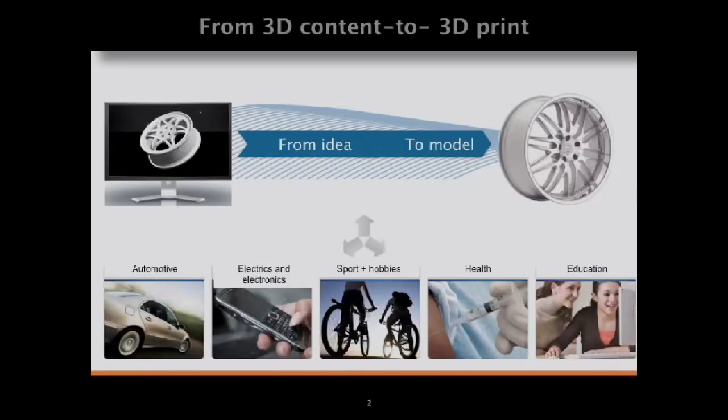The big importance of 3D printing is to realize a real model and validate the concept. It means when I design something - say I'm in the car industry and want to design a part for cars - on the screen I see it in 3D, but once I print it, I can really see all possible errors I could make, or modifications I have to do, just to have a validated part.

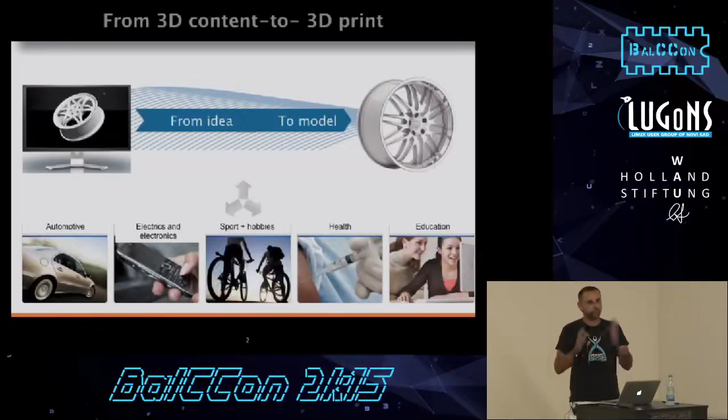After that, we started to go further into electronics. For example, we have cell phones - we design the phone, put electronics inside, validate the concept, and once we make the hardware working properly, we can start serial production. So it's a kind of intermediate stage between development and industrialization. It can save us a lot of money, because once we make errors and discover them during the production process, we lose a lot of money.

And for sure... oh, fuck.

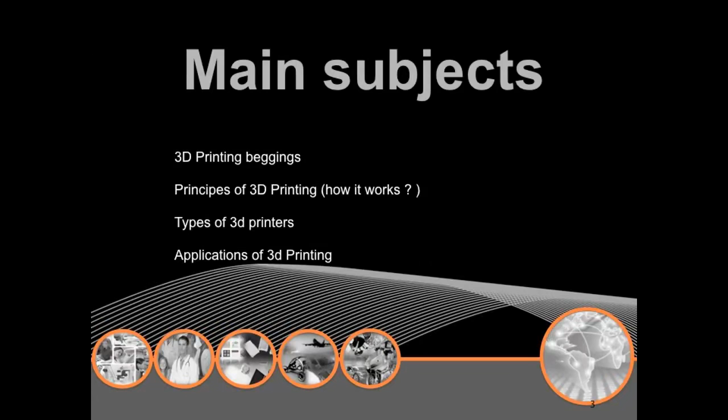Never mind. About the subjects, I would like to talk about the beginnings of 3D printing, because although we started talking about it a couple of years ago, the technology has existed for 30 years. Since then we've been printing in plastics, metal, and now we're even able to print in chocolate or sugar, in colors or monochrome.

Also about how it works - how we print in 3D, what is the secret, what is the main procedure, the principle of 3D printing, about the printers, and all interesting applications of 3D printing. Let's start about 3D printing, how it works.

You will see the liquid plastic and UV laser that will polymerize layer per layer. After every layer, the platform with the built hard plastic goes down, and it makes the final model. The technology is named stereolithography, and we use photosensitive polymers.

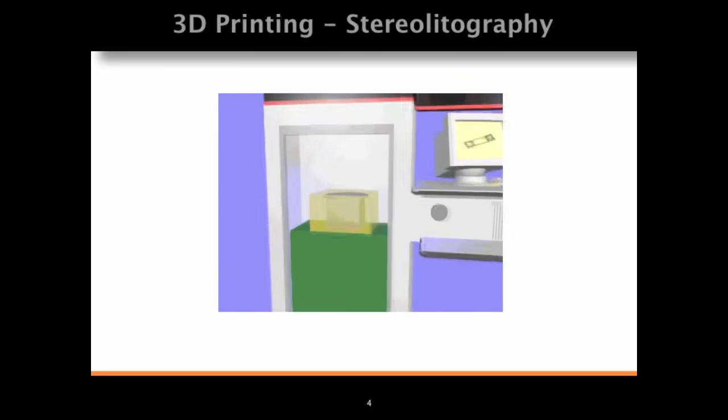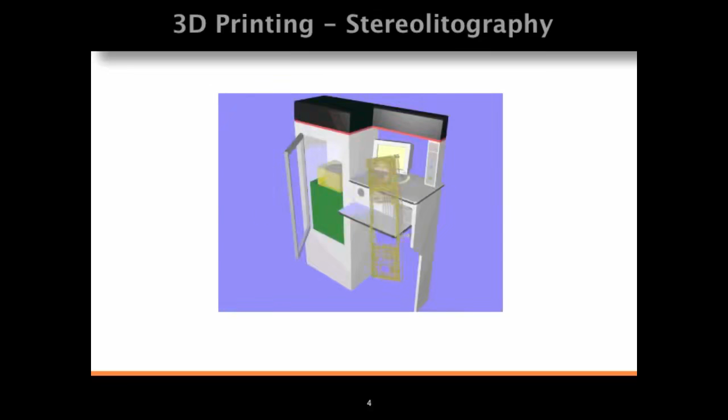Stereolithography technology is very used in the car industry, because for big, real-size parts of cars, trucks, planes and everything else, we can quickly make real models and mount them on the cars. For example, all new prototypes of very luxury cars are presented with a lot of printed parts because we can paint them, brush them, polish them. We can do a lot of things with them, and since we have different types of plastic materials, we can really present a nice and functional prototype.

We can print with liquid materials - liquid plastics sensitive to UV - or solid materials, which are plastic powders that we melt layer per layer. The main principle of 3D printing is that we print layer per layer.

If you cut circles and stack them, you get a cylinder. 3D printing is the same. So technically, it's not a very complicated process.

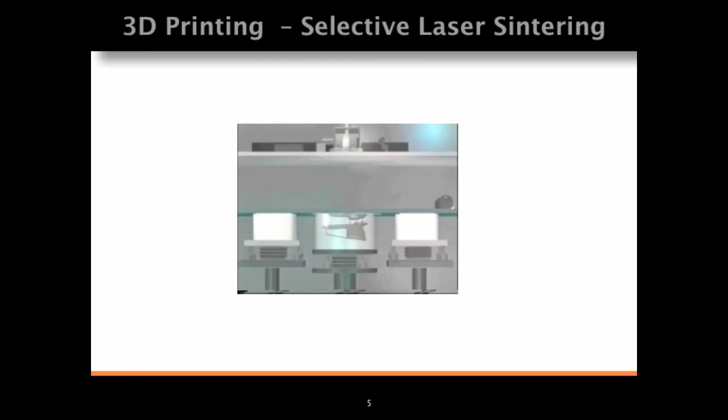Here is how it works with powders. We have a thermic laser that will melt a layer of plastic. Then we come with another layer of plastic powder, and we melt it up to the end of the part. In a couple of hours, we have our part finished.

About price range, we have three groups of printers. We have the personal ones, from 1,200 euros up to 20,000 euros.

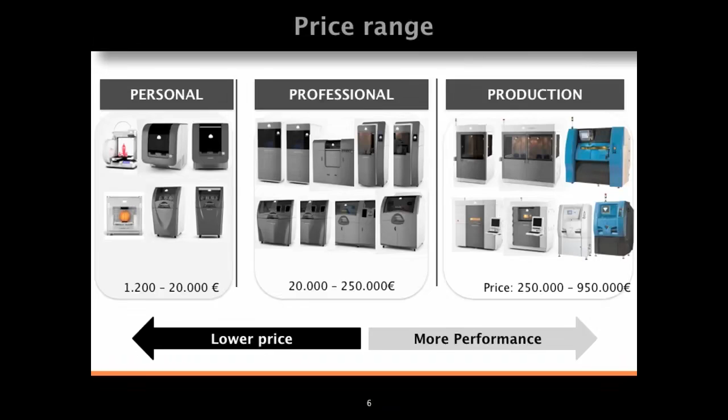We have professional machines used mainly by engineers, architects, people who make the concepts and projects before industrialization, and we have production printers. That means with those big machines, we manufacture the parts that we will mount in different industry fields.

For example, General Electric has something like 40 to 50 3D industrial printers. All big industrial leaders are also equipped with printers. Formula One teams also, every Formula One team has 3D printers.

When they have some idea for a design, some new aerodynamic parts, they draw it in 3D with CAD tools, and then print it. They can mount it on the Formula One car, check the shape, put it in the wind tunnel, and really increase their aerodynamic performance. When we make parts for planes or cars in any industry, we do the same.

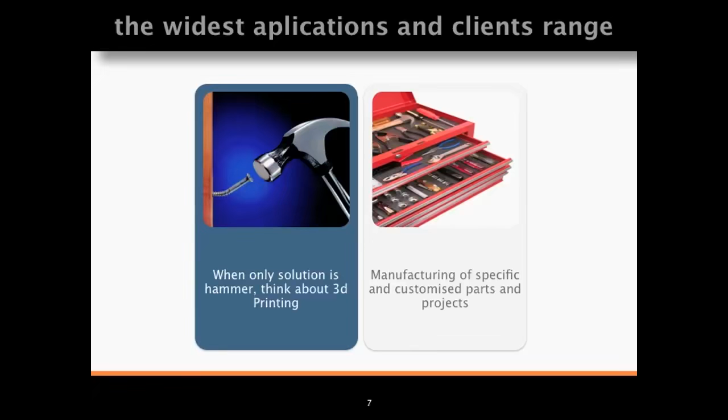As we make it layer per layer, that means we can imagine a sphere inside a sphere, and we can print a sphere in a sphere as one part. We can also print complete assemblies that you can move, and it's only one part - you cannot disassemble it, you need to break it. Otherwise, you would need to spend a lot of time making this by milling, drilling, and other conventional manufacturing methods.

During those 30 years, we got in our portfolio big clients, big companies like GM, Honda, Airbus, Toyota, BMW, Fluke, 3M, Videx, Siemens, and other industrial companies using our printers. Even ear plug devices now are printed, the plastic parts are printed. So we just put in electronics, and we can customize earplugs for every ear.

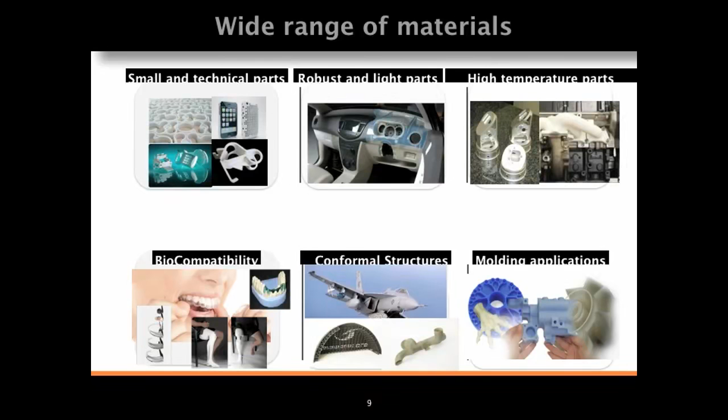Concrete example: I had a surgeon, an orthopedic surgeon, asking me, can we make specific drill machine guides that will allow us to drill the bone at a specific angle, customized to the patient. That means we scan the bone in 3D, and after that design the part adequate to his leg and his bone, to fix something in a specific position decided by the doctors, surgeons, and medicine staff. And it was possible.

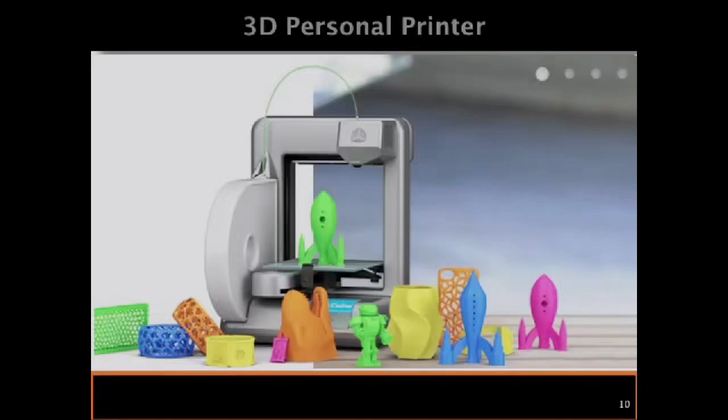I will also talk a little bit about small 3D printers, the ones you can have for your home. Those printers work with a very simple method where you have just a roll of ABS or PLA plastic. It heats and melts the plastic, and layer per layer we can design the parts. It's a perfect solution to start with 3D printing. We can even manage a couple of colors, so we can make a mix of 3 or 4 colors, for some unique parts where we just show the shape of the part. It's a very cheap and efficient technology.

What's also interesting about these personal printers is there are heaps of open source machines. I'll give you some websites afterward. You can really order the kit and learn how to do it, and make your own printer for less than 500 euros. With 2 normal 2D printers, you can make one 3D printer. It's already something you can design, for example your house or whatever you want, and you can print it and have it in your hand.

With the same principles, we can even print sugar, even in color. That means if you have a wedding cake, you can scan the bride and the groom, print them in sugar, and then after the wedding the lady eats the head of the guy. Or with chocolate, if you're a creative person, you can play with the flavor of your chocolate and design the parts in chocolate that you will eat afterward, in relation with the flavor of the chocolate.

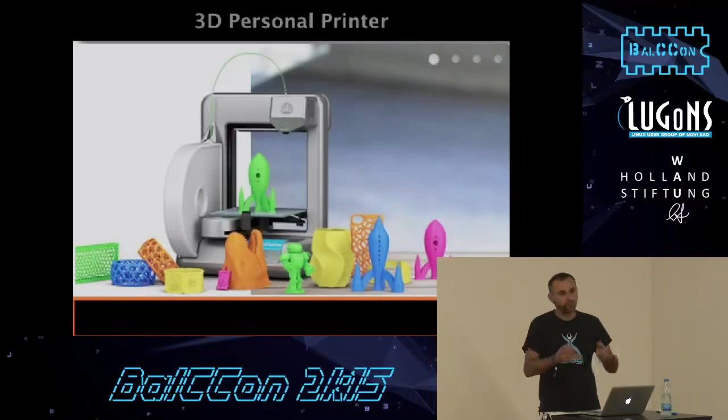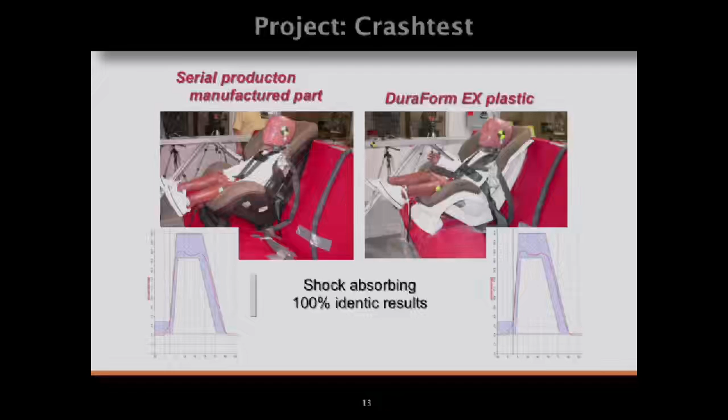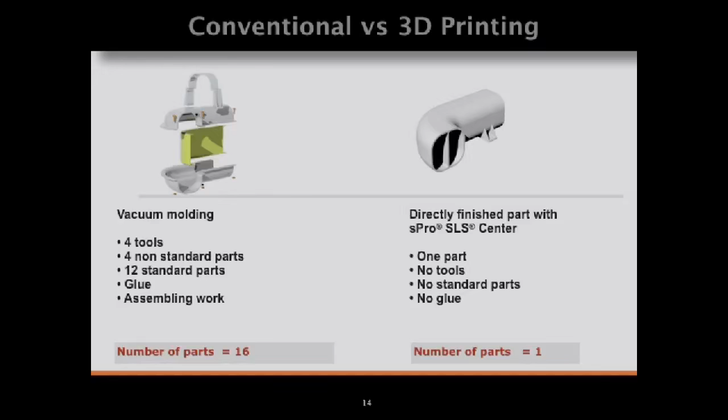Otherwise, we have, for example, conventional versus 3D printing. Same part with the same function - you have air passing through the part. With conventional methods you need 4 tools. You have non-standard parts, standard parts, glue, assembling work, and it takes more time and is more expensive than a directly printed part. There are no tools, no standard parts, no glue, nothing.

A real application of all this is cooling systems for electronics in combat planes. As they have a lot of electronics left, right, up and down, you really need ventilation with very complicated pipes and parts. With conventional methods, you need 10 days to make the final part. With 3D printing, you make it in 1 day and just mount it in the plane.

Airbus started to use these technologies to make the non-functional parts of planes. So when you fly in the new Airbus A320 series, you will have 3D printed parts - holders, brackets, and things that don't concern the structure of the plane. It goes much faster, and we can make lighter parts.

About materials, we can have a really wide range, including reinforced materials - plastics with metals, plastics with carbon fiber, with nanoparticles, with glass nanoparticles. At 1.5 kilos per cubic decimeter, we can have really rigid and resistant parts - as resistant and rigid that we mount them on Formula 1 cars and race with them.

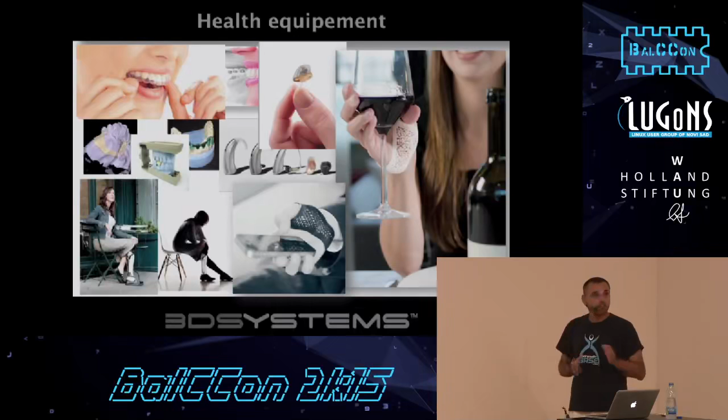Dental industry too. For the prosthesis, you don't take the print of the tooth anymore with rubber and chewing gum and all that stuff, we scan with a 3D scanner. Once we scan it, we print the teeth, and then we can make custom-made prosthesis for this person, because everybody has his own morphology, and with these technologies we can really adapt all repair kit tools to the person.

And like this, you can have better results. Finally, we are humans, and if we develop some sciences and technologies, it's a good way when it serves to improve the capacities of humans, not to kill other humans.

Otherwise, you've heard, I think the big boom of 3D printing is the guy who made his gun with 3D printing. It's more or less fake. I mean, you can print some parts with your small personal 3D printer, but after the first shot, it will explode in your hand and cut it. So you can really only print a couple of decorative parts. I think healthcare equipment is much more interesting than manufacturing guns.